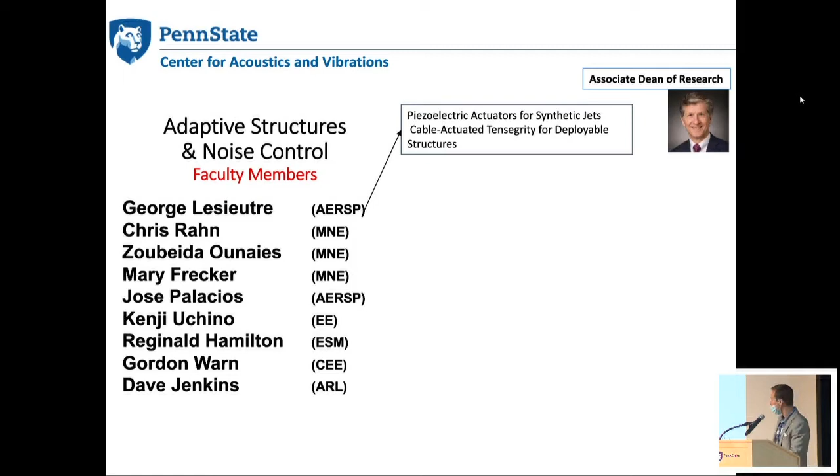So really fast, let me introduce some of these gentlemen. You have work going on in terms of piezoelectric actuators and deployable structures. That will be from George Lesieutre. From Chris Rahn, you can do all kinds of different activities that you can read here on the board. And again, the group continues passing through myself, which I'm going to list some of those in my presentation coming up, and other of us in the group. I would like to remind you that Ken Uchino actually retired recently, so unfortunately we've lost some of those capabilities, but I'm sure he'll be willing to answer questions if you reach out. I know he does for me.

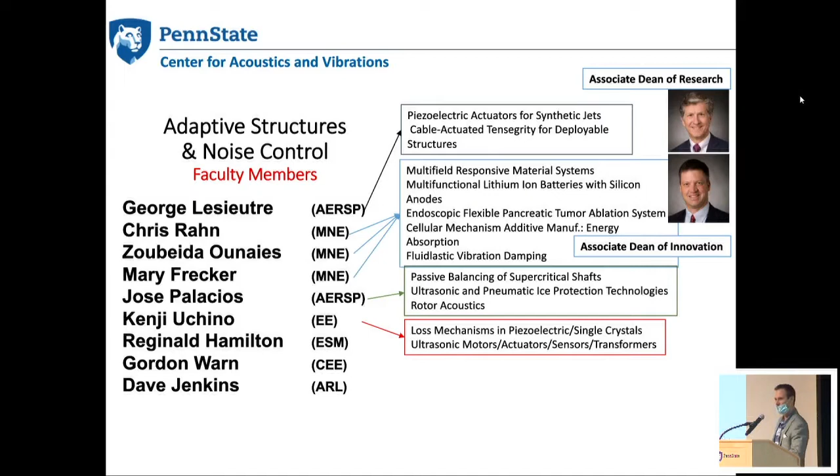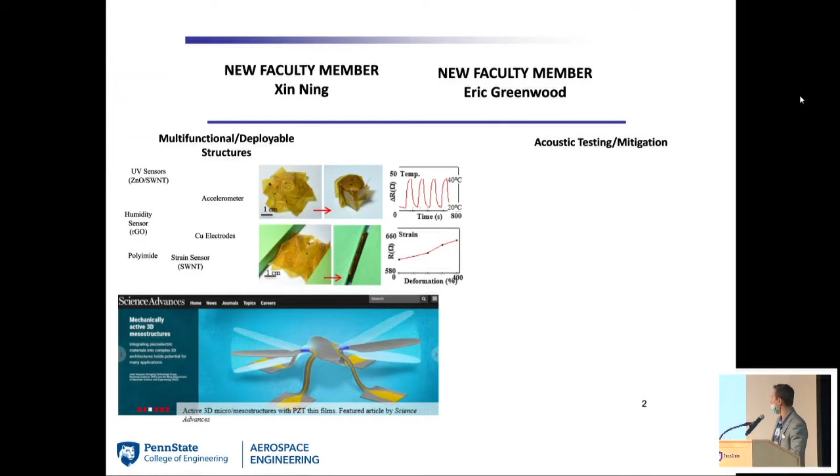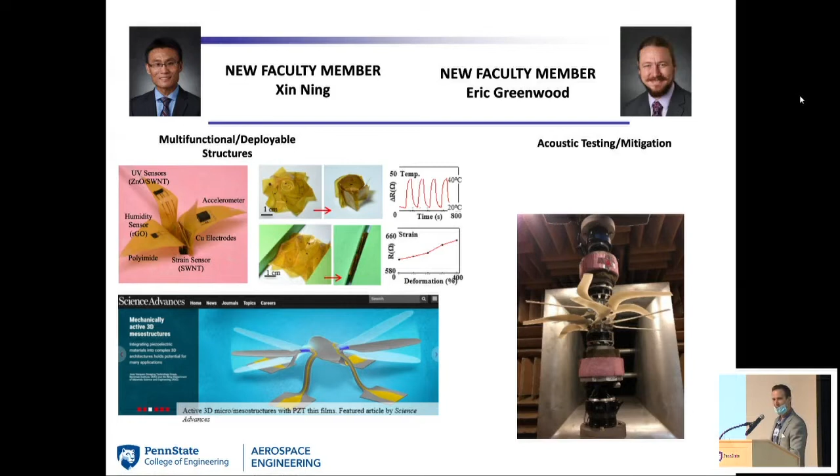And with this, let me go ahead and introduce the new group, because the good thing about the university environment is that we always have new blood coming in with new ideas and new assistants. So really fast shout out to Professor Ning and Professor Greenwood. You just saw some of the content from Professor Greenwood. And they're doing some pretty neat stuff in terms of multifunctional deployable structures. And Eric is working, I don't know why that's not showing. There you go, slow. Working quite a bit on acoustic testing, and it is a great pleasure that I'm actually working with him on some of that. I guess I can say that you're my partner in crime, literally.

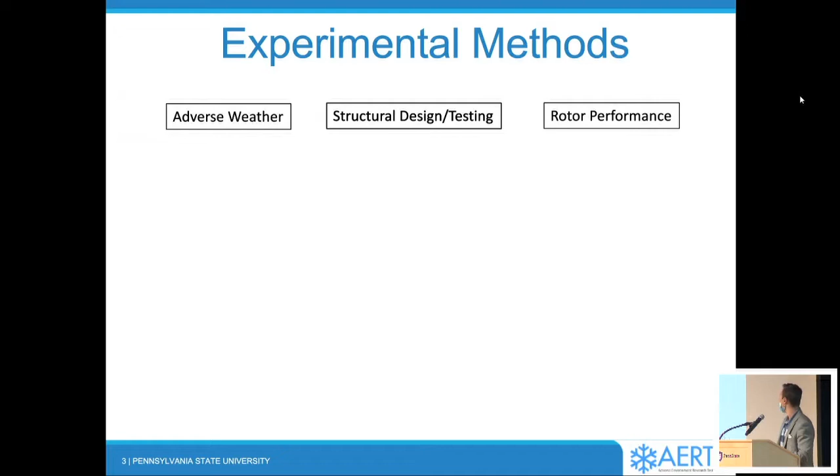So with that, today I would like to introduce myself, some of the things we do from my specific group. And in that front, I guess my hat will be an experimentalist. So anything that has some experimental component, I think I might be able to assist. So let me go through some of these different tabs that I get my hat switched on. We do quite a bit of structural design for testing. So for example, one of the projects we were working on has been the Dragonfly. And this is not quite too related, I guess, to adaptive structures, but certainly related to design of structures.

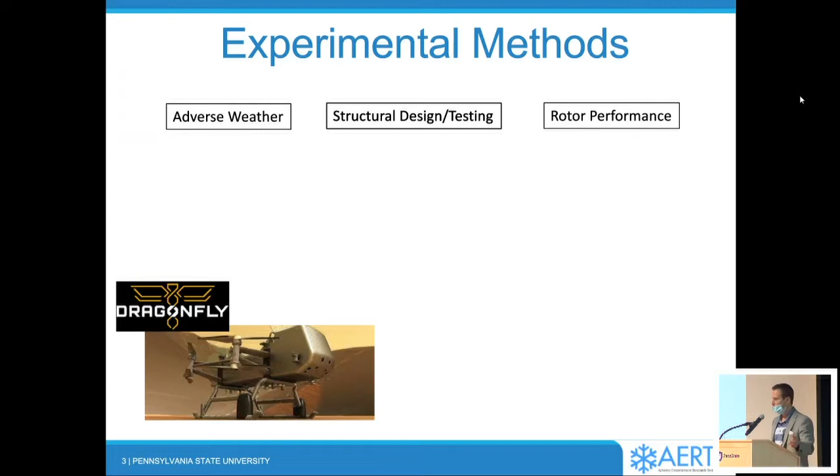So we have assisted with the design of the blades, and we have already conducted some half-scale wind testing at the 14x22 NASA wind tunnel. And we're very excited that we're going to go with a full-scale blade. These are 1.4 meter blades, coaxial configuration, to the TDT, Transonic Dynamics Tunnel at NASA. Heavy gas, try to reproduce somewhat of the aerodynamics that Eric Greenwood was talking about. You cannot run these things otherwise when you're trying to match Reynolds numbers, for example. So a little brief on that.

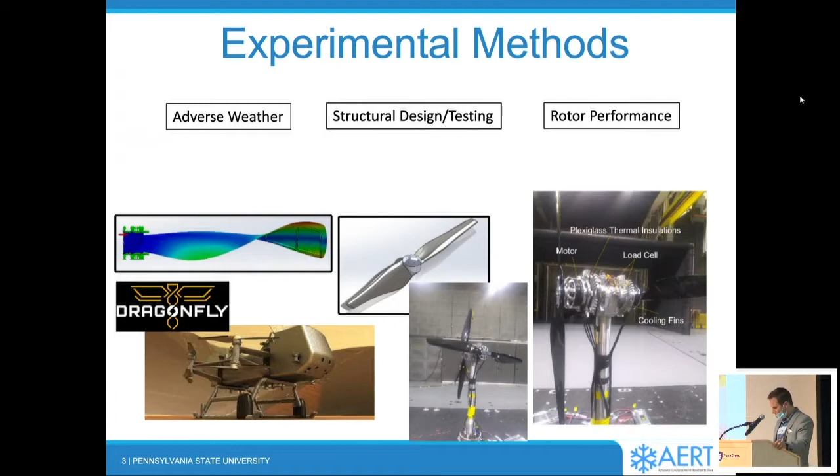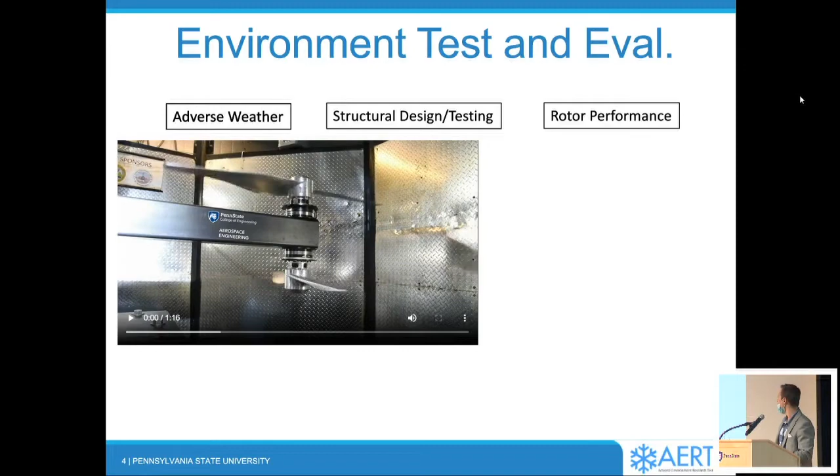Here I can show you a video of actually a full-scale configuration that we already tested. This is not at the TDT, obviously. This is in one of my chambers, so it's not aerodynamically comparable. But I can start playing with what the loads do, right? What kind of vibrations am I going to have to deal with on those arms and so on. So anyway, that will be my structural design testing hat, which now I'm going to go ahead and switch. If this moves forward, we want to move forward, please.

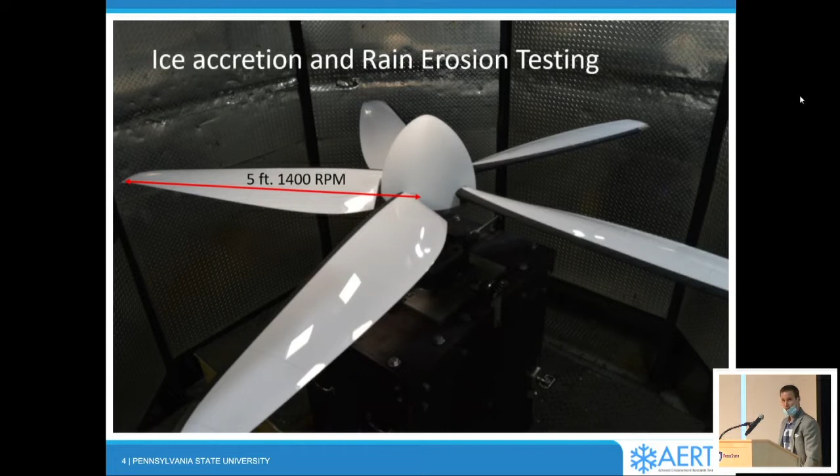Okay, so at that point, once I started creating ice on the rotor, I don't really care much about the aerodynamics. So I thought to show you that photo because the next tab I wanted to talk about is not the icing yet, but remember that rotor. I'm going to talk now about rotor performance, which we do a lot of balancing, acoustics, and aeromechanics.

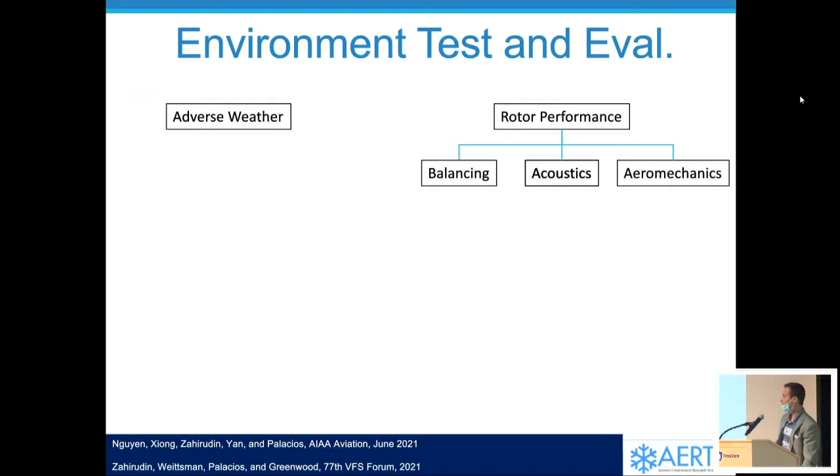Okay, so if we go ahead and look at the acoustics, this is now still in some of the facility photos. I work with Eric Greenwood. Some pretty nice capabilities there. If you're going to be in the short course, I'll show you all of these details tomorrow.

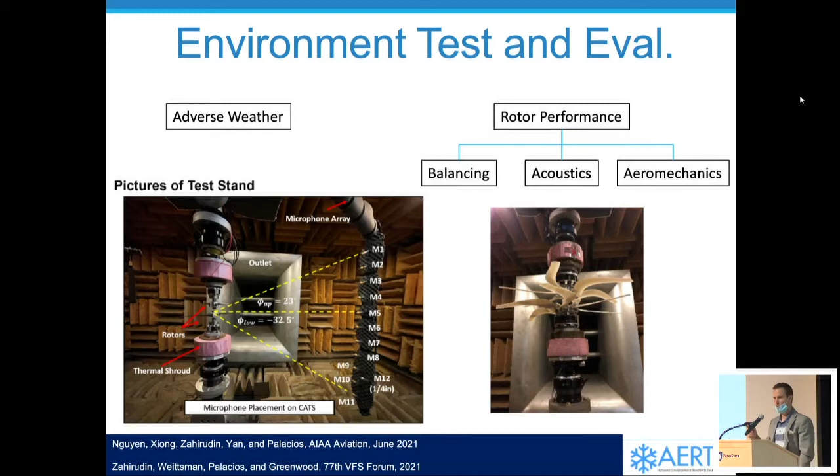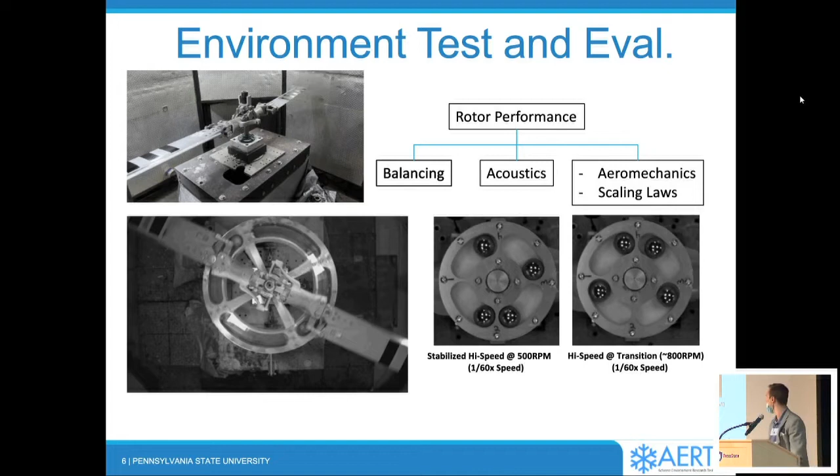And if we look into, let's say, balancing, that's the topic of the presentation today. Okay, I'm going to focus on adaptive structures, and we have developed a very neat passive balancing configuration that adapts to the vibration of the system to get rid of that vibration. So that will be the topic today. I'm not going to brief these images because I'm going to go through them in detail in the presentation. So let's go ahead then and start this presentation.

I got to give a shout out to my students. Really, they are the guys that make me look good. Lots of work done by Ahmad Haidar, currently working at Leonardo. He started this topic. And later, Ryan Blessington continuing the work. So I'm going to brief some of their work today. And again, the topic is passive balancing.

So your washing machine at home works on that principle, right? When you put your clothes on and all the clothes end up on one side and the machine goes supercritical, meaning post first resonance frequency, water on a surrounding channel goes opposite to those clothes to balance the system. So on that same concept, we decided to develop an adaptive balancer that will assist us with these imbalance events.

And imbalance events, I'm going to show you, there could be multiple. You could be thinking about a jet engine that loses one of the blades, or let's say that the blades start getting eroded asymmetrically. So that will introduce vibration to your jet engine, for example. Rotorcraft. Rotorcraft are not supercritical in general. But now that we start talking about these smaller eVTOLs, the rotors are becoming supercritical. And if you want super smooth flight for whatever mission you're doing, you could potentially introduce these passive balancers.

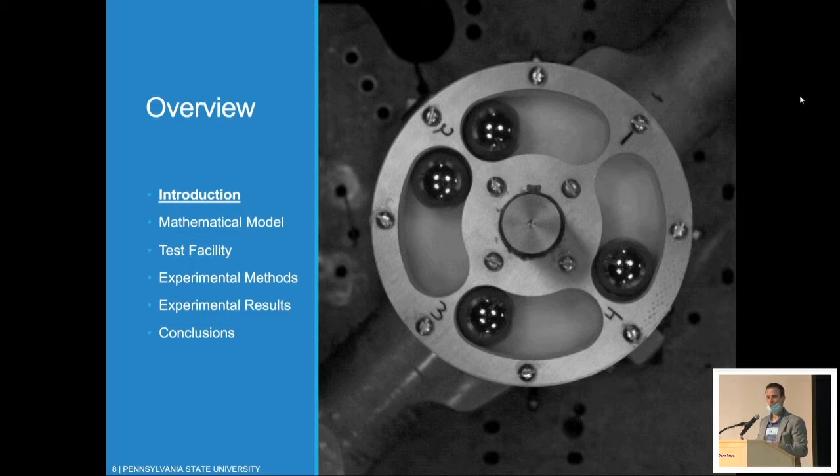So let me go ahead and give you a brief introduction. Again, you're going to have some eccentricity due to some imbalance. And the whole goal is to get rid of that vibration only when we are supercritical. This system will not work pre-resonance, and I'm going to explain why that is.

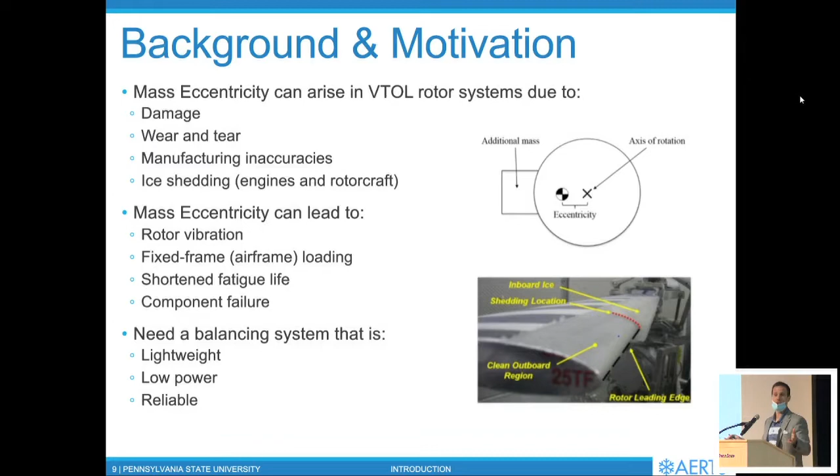So in my specific case, if you remember, I have a hat that is aircraft icing, right? So one of the big imbalances I deal with is ice shedding events. I'm flying the V-22, one rotor sheds one blade, the other two didn't shed. Now I have a huge imbalance on that rotor, right? So V-22 will not work because it's not supercritical. But if we have a smaller vehicle with the same configuration, for example, we would like to have a smooth flight even though we have ice shedding events.

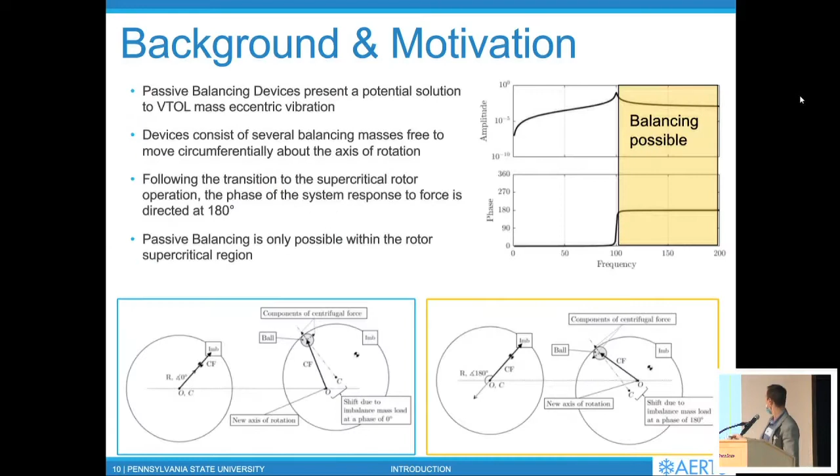So let's go ahead and look at how this eccentricity works. And again, this only works once you are post first resonance frequency of my system, okay? Before resonance it will not work. So let's explain that really fast with some images. Pre-resonance, if I have some imbalance, and I look at the forces acting on some masses around the imbalance. So the whole concept is to have these free traveling masses around the eccentricity. We're replacing the water in the washing machine with masses that can move on a track.

So you can clearly see that pre-resonance, 0 degrees, I'm on the blue box. My masses are going to go with the imbalance because I have a zero phase effect on that mass, right? So I'm going to make things worse pre-resonance if I have these masses freely moving around.

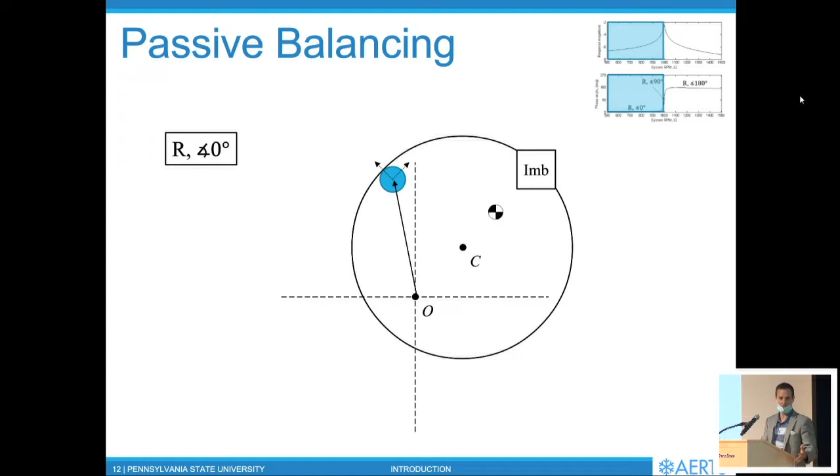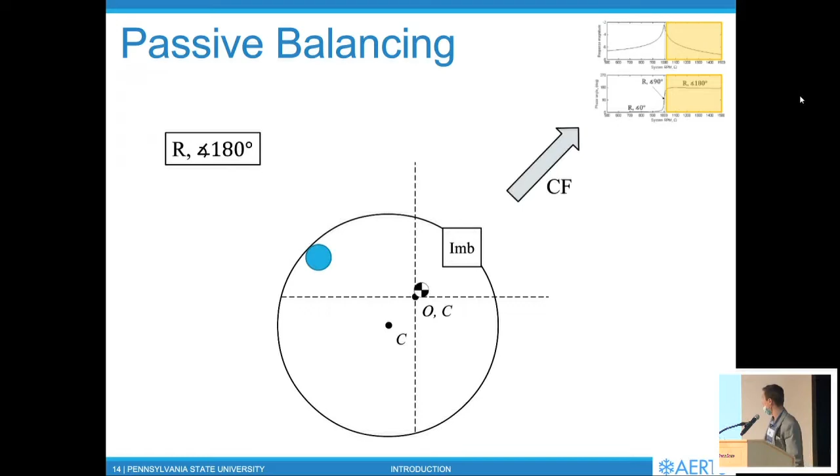Now, if I am post-resonance, post-180, the opposite happens. You see that now my forces are actually going to push the masses against the eccentricity, potentially balancing the event, right? If this clicks forward, there you go. The mass will go against the eccentricity, and now I have a balanced system.

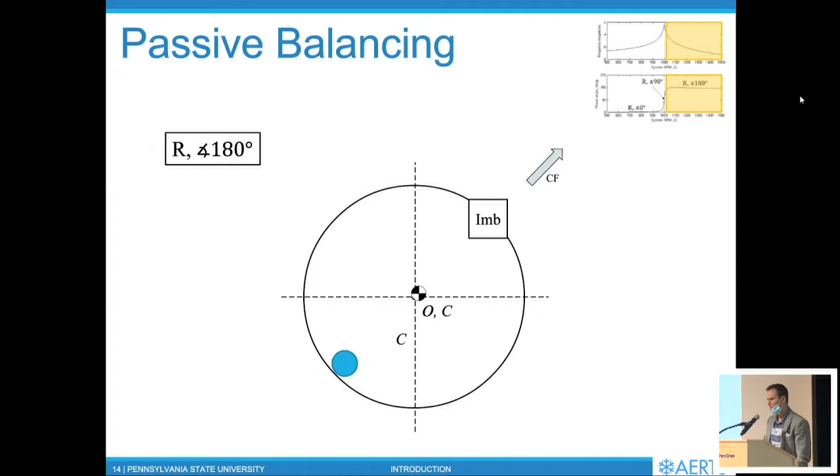So if we can introduce these free masses moving around that center of rotation, and I have a sudden imbalance, I can bring the system back to balance really nicely. So that's kind of the goal. This is what we want to develop. And obviously with applications to rotorcraft, that's my biggest hat, I guess, rotorcraft applications. Again, as the vehicles become smaller and smaller, eVTOL, you're starting to potentially be able to have supercritical conditions.

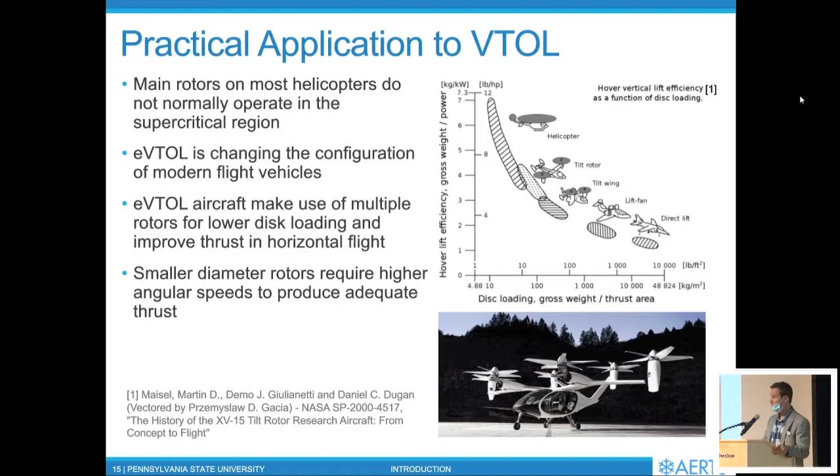And by the way, this is the rotor, the 10-foot diameter rotor I showed you in my facility. That's that vehicle. It was a very, very neat set of tests. So with that, and obviously jet engines, that would be the beautiful application. Those are all supercritical. Okay, so skip. Let's talk about partitioning.

I told you that if I have these masses around a track and I am pre-resonance, until I reach the resonance, I'm going to make the system worse. The masses are going to go with my imbalance, right? So to limit some of those effects and to also limit cycles that might occur through transition, we put partitions. So that way we do not allow all of these masses to make it really bad as I go through resonance, okay? So that's one of the tricks we learned through our modeling, which I'm going to brief really briefly.

So let's go ahead and show you what will happen without partitions. Subcritical, all the masses make everything pretty bad. But if I have my partitions, I'm going to limit those negative effects pre-resonance. So that's lesson number one that we developed for this technology. Supercritical, obviously, you're going to go against the imbalance, and you're going to make the system better. And we're going to show you all this with high-speed cameras if this works okay online.

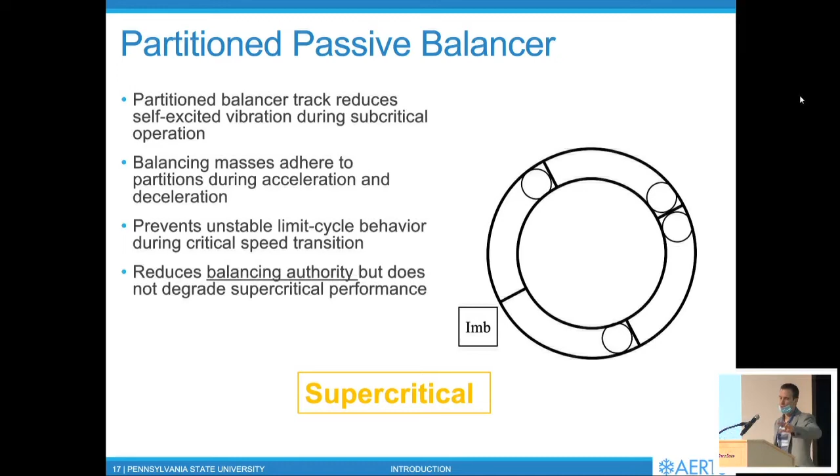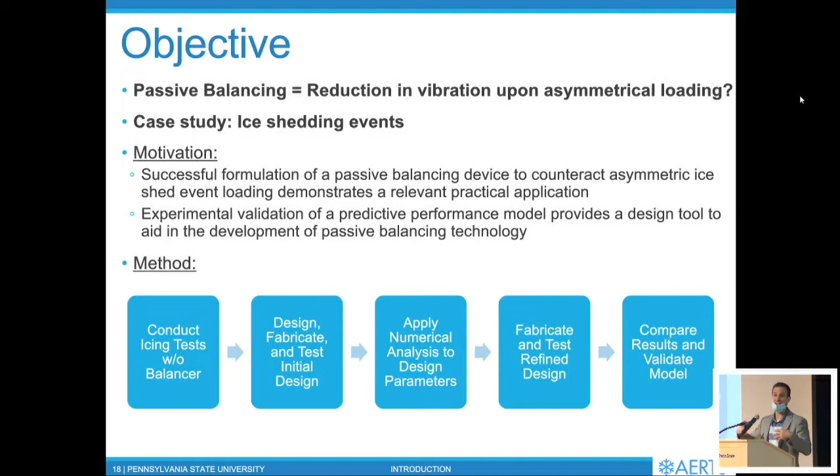Okay? So the objectives, again, is to develop a passive balancing system, and the case study that we focused on was ice shedding events. And this is very useful for us in the lab specifically because we run a lot of shedding events for different testing. So having the capability to balance my system allows me to run many hours of ice shedding for the customer. Okay? But again, that's not the only application.

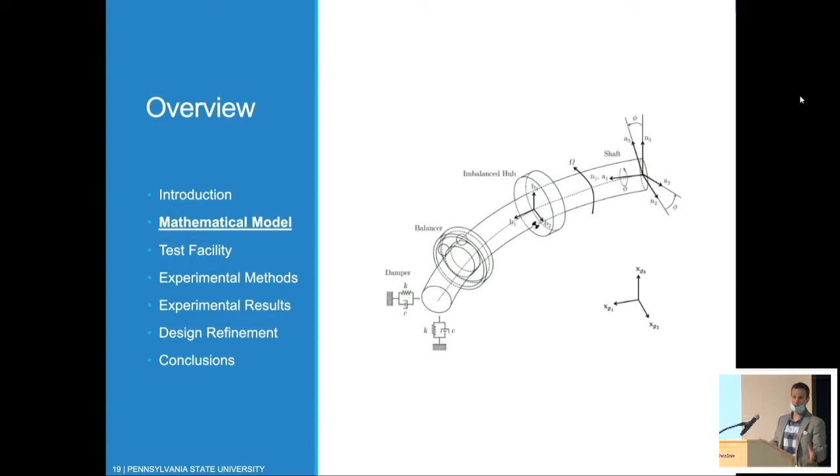So with that, I'm going to flash at you the mathematical model. And the reason I put this on the slides is in case there is somebody really interested in these topics. You have the slides. You can go through the equations. You can most certainly contact me or go through some of the publications. But it's a very comprehensive model, which has taken into account the flexible shaft, the friction of the balls, the centrifugal forces, of course, all the damping that could happen between the rotation of the balls and the track.

There's a lot of components that were not taken into account in the literature that have a massive effect on how you model and design the systems. If you ignore some of these factors, you will get potentially the very wrong answer, right? And I'm going to actually show you what happens when you use the wrong modeling, because our first passive balancer that we designed for my facility was based on literature equations. And we ended up with a balancer that didn't work, okay? It was only when we introduced friction on the balls traveling on this track that we were able to come up with a configuration that actually was applicable.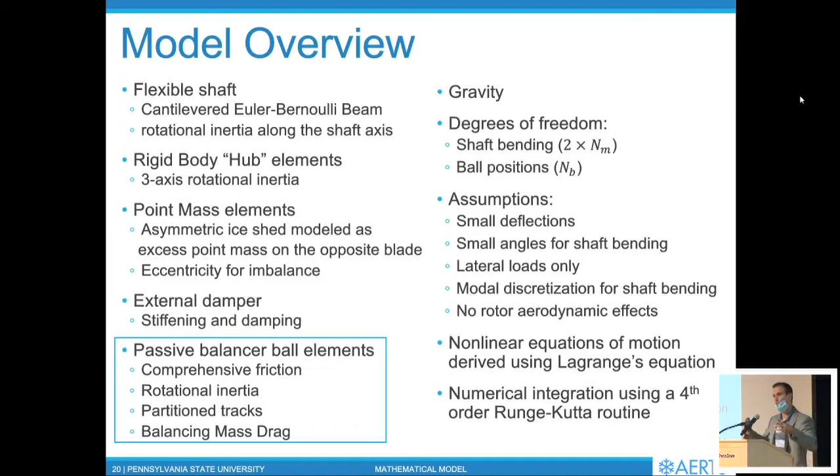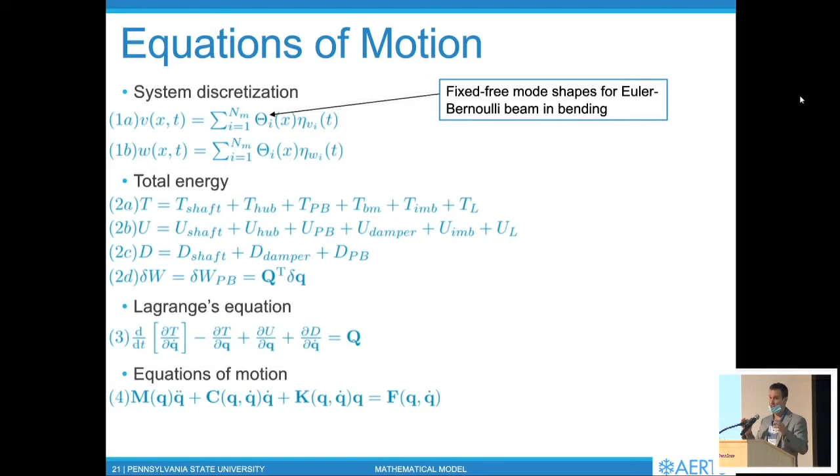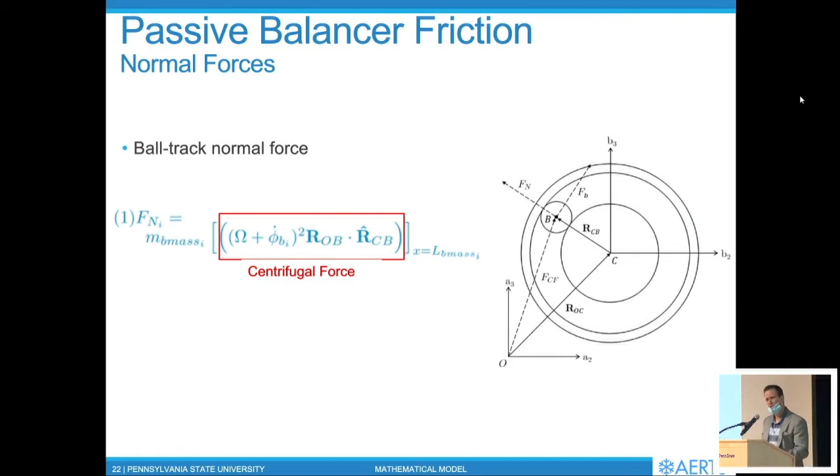So with that, let me flash you some energies, okay? So we're using Lagrange's equations, right? Trying to come up with the equations of motion. We're taking into account all my energies, and you can probably add even more terms. We're starting to consider now the fluid in the track, because I believe we can do some pretty cool things if we change the fluid from air to something else, right? So again, just flashing those at you. We're taking into account all the normal forces, the centrifugal forces, the friction, the rotation of the balls, the deformation of the track, okay? And all of those are going to show up in these equations, which end up in a model.

So let's go ahead and pray that this plays. Seems like it's playing. I see some motion on the bars. Is it playing? Please play. Is it playing? This is the problem of running things from online. It should be playing. We're not going to be able to see it. Hold on. Hold on. Let me go back. Okay, I see. Okay, is it working? See? It's loading. It's getting stuck. Now go back. Somebody push me back. All right, it's not loading.

Let me explain what will happen, okay? We're not going to be able to see these videos. That's too bad. If you have these presentations, please download them and check them out because it's pretty exciting stuff. What you will see is tremendous vibration on the one without the masses. Then on the middle solution, you will see even larger vibrations without the friction.

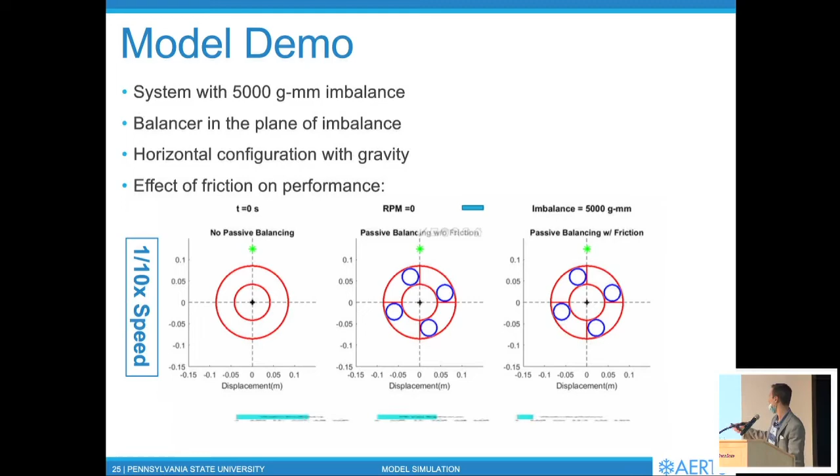And you will see that the friction system ends up with a solution that is different than the one without the friction. Okay? And I don't know why it's not playing, so I'm not going to spend any more time explaining it. What's that? Yeah, but you should be able to see those masses moving around. I don't know why it's not playing on the presentation. So in any case, take my word for it. See if you can download those and see the videos, and you will see how important it is to take friction into account.

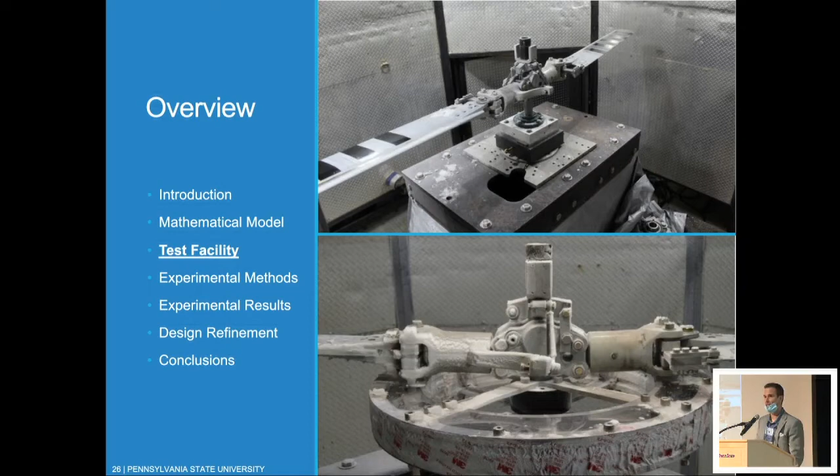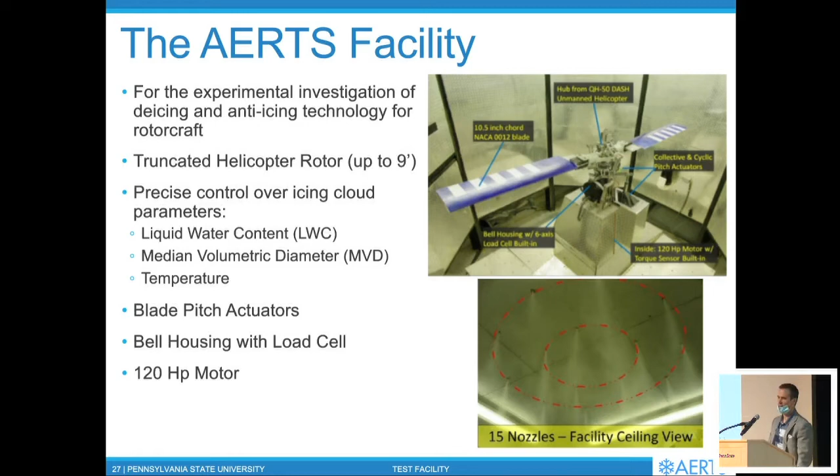So now we're going to go ahead and move on to our specific application, which is trying to make this work on the icing facility. Again, the rotors will accrete ice, the ice will shed, and eventually we want the passive balancer to take over. So the facility, the first balancer that we designed, again, was done without taking into account friction on the system. And we came up with this configuration that told us that it was okay to put the balancer under the rotor, told us which diameter we should use, right?

And we ended up having issues with friction because centrifugal forces will take over at a specific size of the balancer. And the balls will get stuck, and they won't be able to roll around the system freely, right? So the size of the balancer becomes extremely important related to the friction, which comes from the centrifugal loads, right? So right there, I already ended up with a system not working because I used the wrong assumptions on my models.

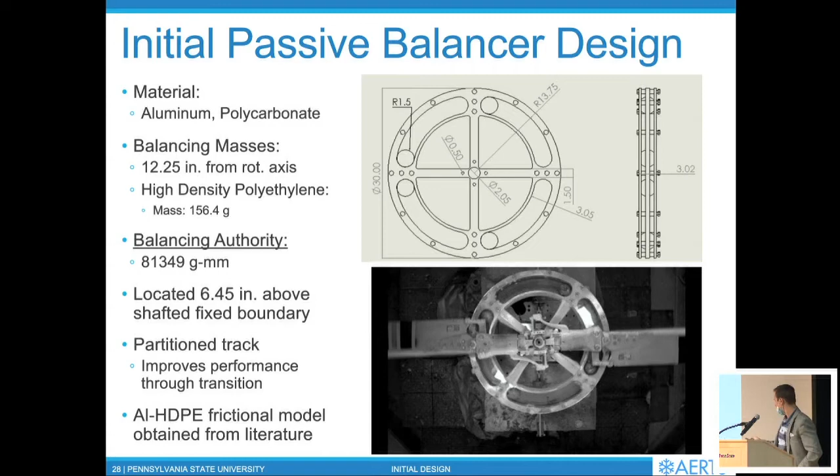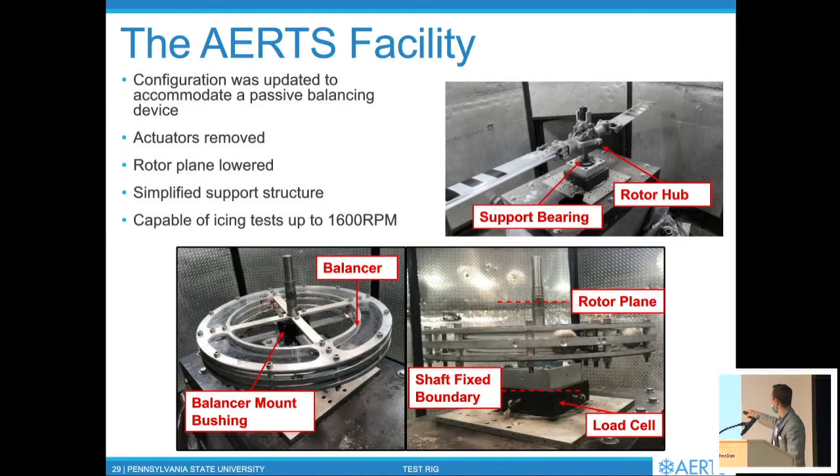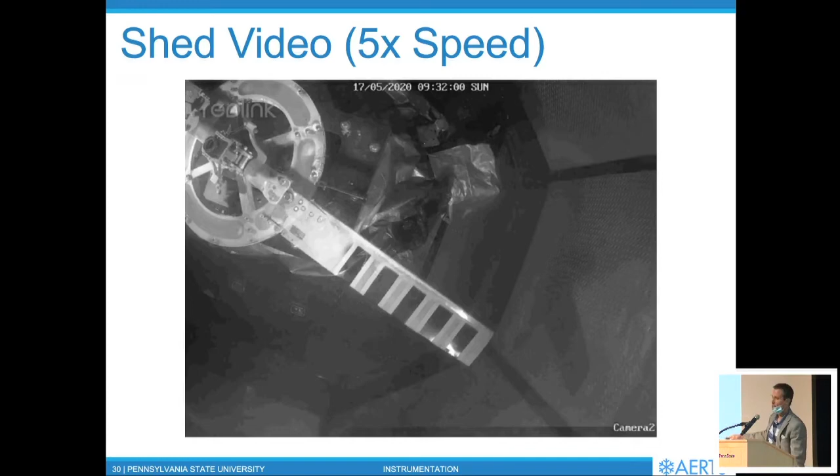So before we run to the actual configuration, I do want to show you what happened with a system that didn't work. So this is the balancer that we fabricated, has the masses traveling around it. You can see the partitions. You can see how it goes below my rotor. And here, this will be a high-speed visualization video of ice accreting to the blade and then shedding, okay? And again, we might not be able to see any of these high-speed videos given the internet connection.

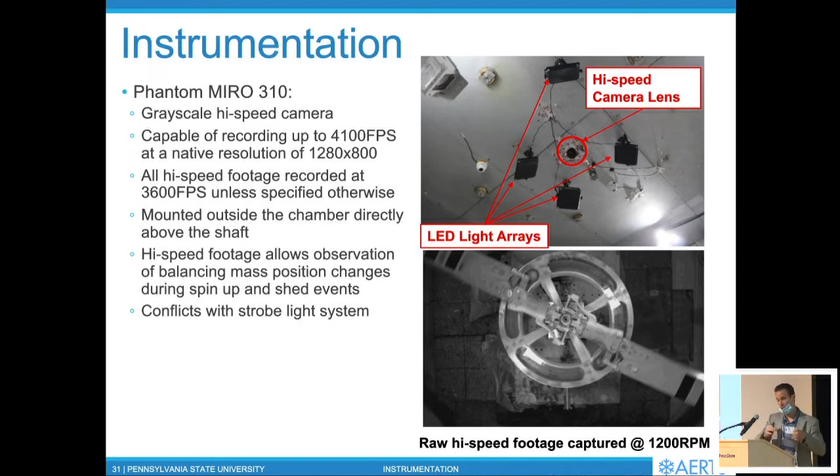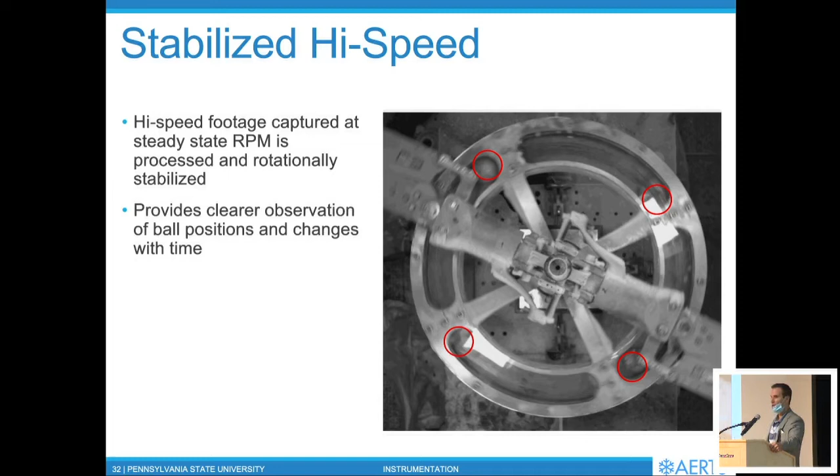We had a high-speed camera up above, so what I was doing is looking at the positions of these balls as they would move relative to my system. And the point is that these balls, right, on the high-speed video will just not change position even upon a shedding event, which create an imbalance. Again, friction took over, centrifugal forces will not allow these masses to move.

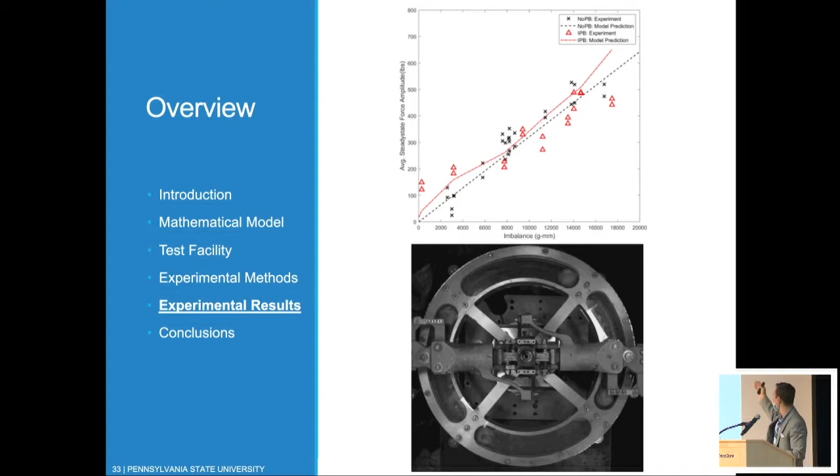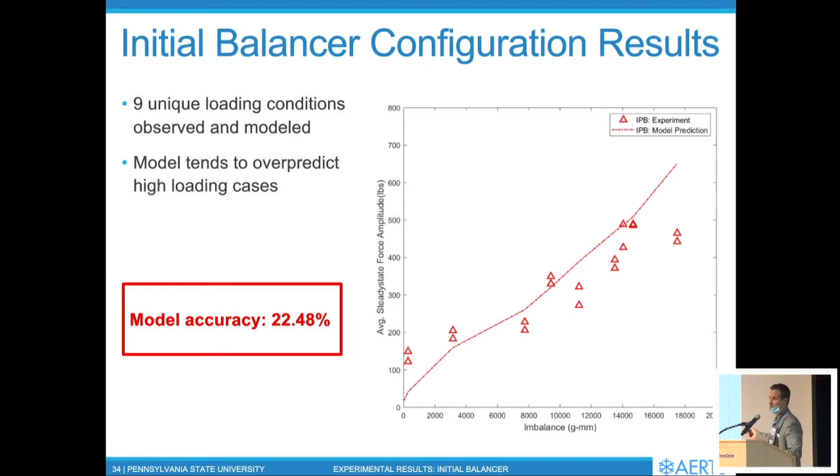So we did have a really good correlation, actually, once we developed the proper modeling tools that showed us what the system would do. And again, the experimental results gave us an accuracy on the model that was very favorable. Vertical axis will be your steady-state force amplitude versus your mass imbalance. But again, the performance was very small, right? These masses barely moved because they were constrained by the centrifugal loads and the friction.

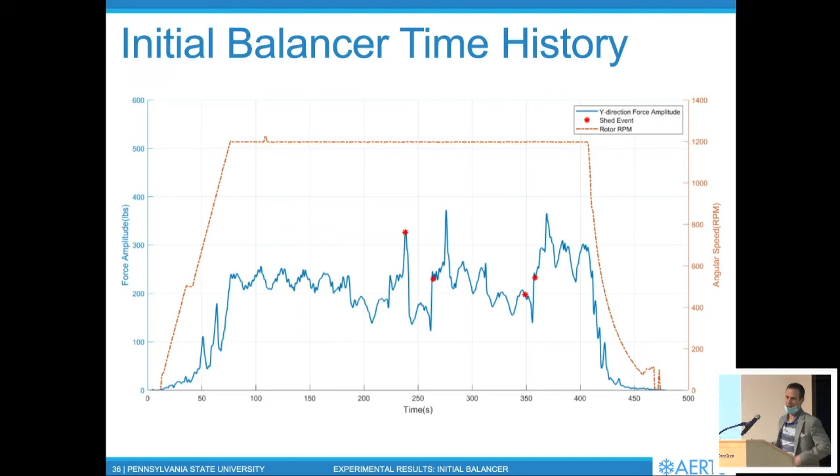And you can see here on this graph that my force amplitude basically didn't really change upon shedding events. The stars will be your shedding event, and you can see how the balancer, in some cases, even got worse, right? So you can see how the peak actually became a higher loading, higher force, even though the balancer should have taken over.

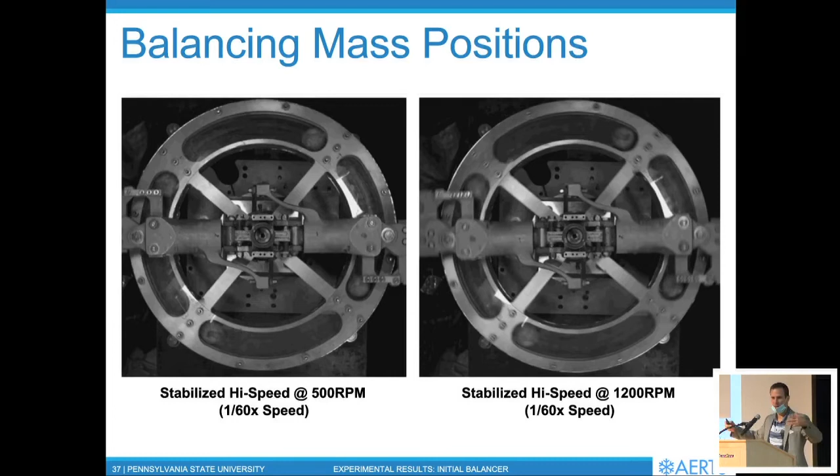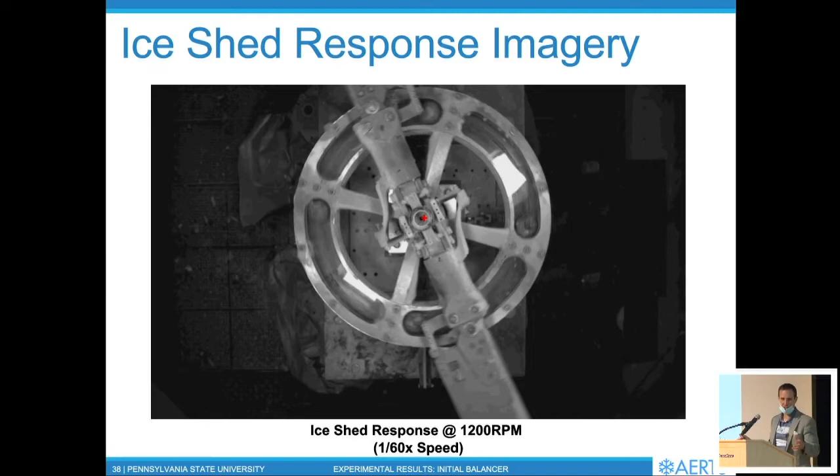So these high-speed videos, which you are not going to be able to see in this presentation, will show you how even at subcritical speeds, when I move on to supercritical speeds, my masses just don't move. They're stuck, right? Again, too big of a system, too many centrifugal loads, the masses cannot move. You had the wrong design because you used the wrong equations. So this, again, will be a high-speed video. You will see the system move around that point, okay? And nothing to see because the masses were stuck, right? So this high-speed video wouldn't help me with anything.

Now, let's use the right equations, take into account friction, and design a system that will actually allow me to balance. Well, let me go back. I'm showing you too much. How now, based on these equations, we got smart and we figured out that putting this balancing system farther away from the boundary conditions will actually give more inertia to the masses, which is very good. Also, we realized that if I make this too large, centrifugal forces will overcome my capability to move the balls. So there is an optimal position in terms of the sizing for those masses.

Also, we got very smart, and since friction is very important, let's not use metal against metal, because it's pretty high friction. Let's use something with low coefficients of friction, okay?

The other thing we saw on the first system is that ice will get into our balancer, and the balls will get frozen in place. So we also encased everything to protect it against ice formation.

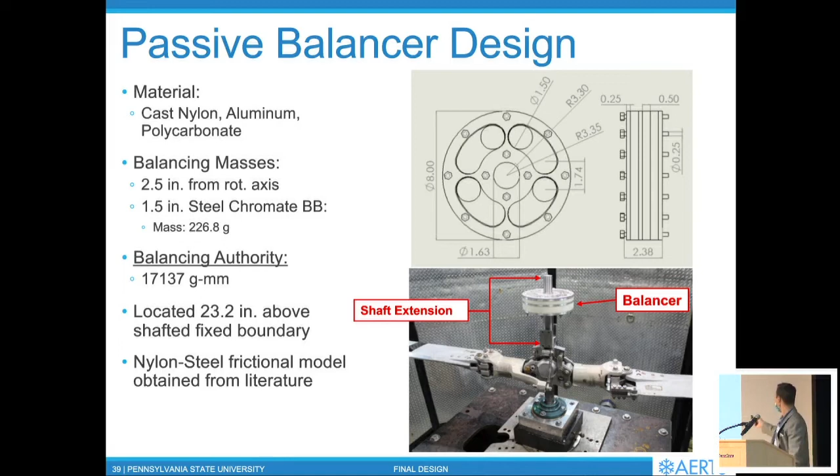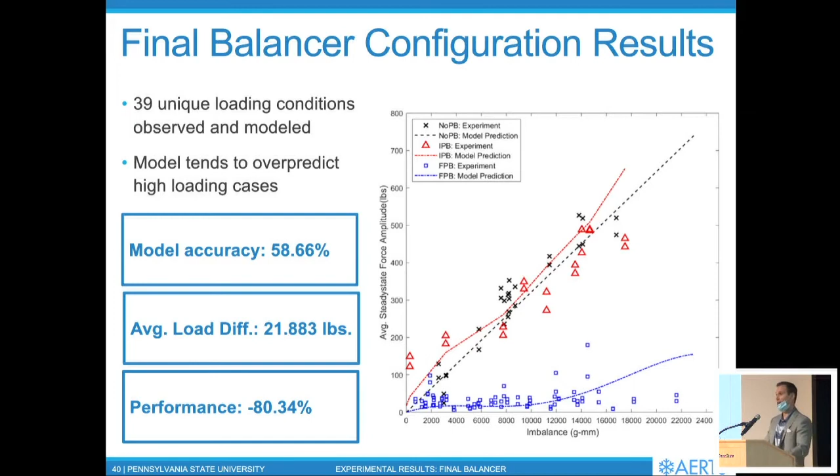So very neat design. And my performance went from 8% to 80%, right? In fact, 8% plus before, I was making it worse, red, to negative 80, blue. Nice design for a balancing system. So this is really the chart that says everything. You can compare to the prior one if you remember, right?

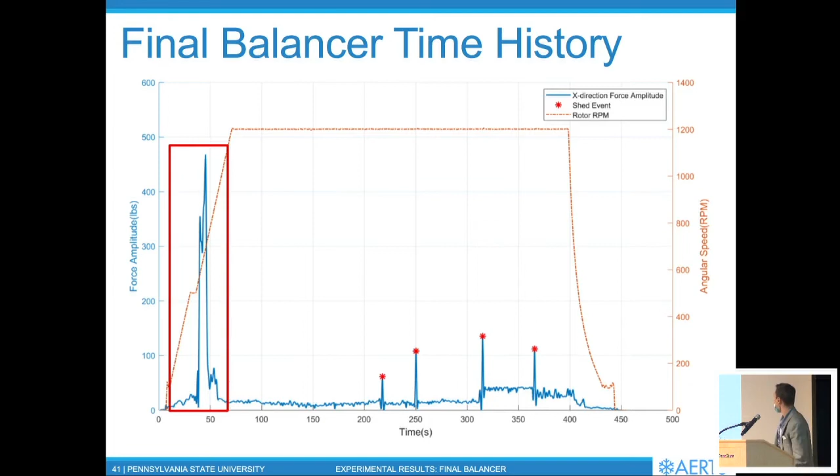So supercritical, we're great. When we're running tests in the lab now and we're seeing shedding events, we are happy. Back in the day, we would shed something and the building would shake, okay? So again, that's my transition point.

This is too bad you're not going to be able to see this because this is high-speed visualization of where the masses go subcritical, 500 RPM. I might tell you that the resonance frequency of my system is 900 RPM. So once I pass 900 RPM, you will see a steady state compensation of the imbalance. So 900 RPM is my transition.

The transition is really neat because this is the area where you cannot find solutions to where these masses go. So they start dancing around quite a bit, right? And then make the system vibrate pretty severely.

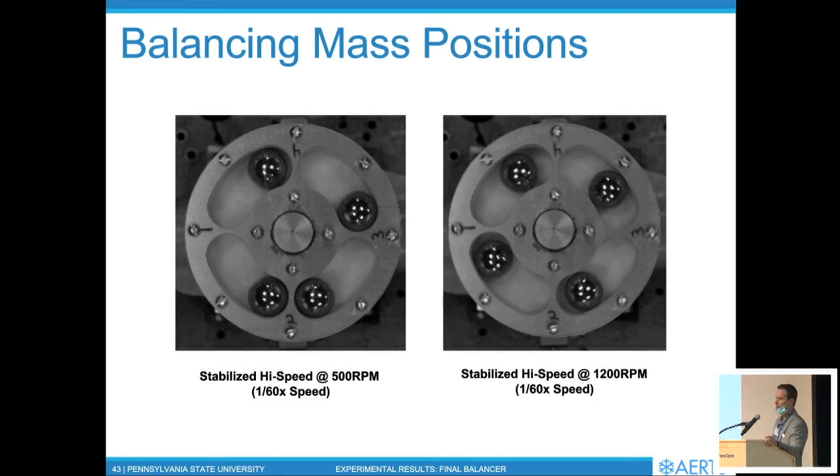Yeah, I don't think so because I have it automatically to start with my click. It's a problem with the bandwidth, right? These are very large videos embedded on the PowerPoint, so they won't play unless we download it. But it's okay. You understand that these balls will be moving, right, quite severely on this high-speed visualization. And if you are really interested, please go ahead and download that presentation.

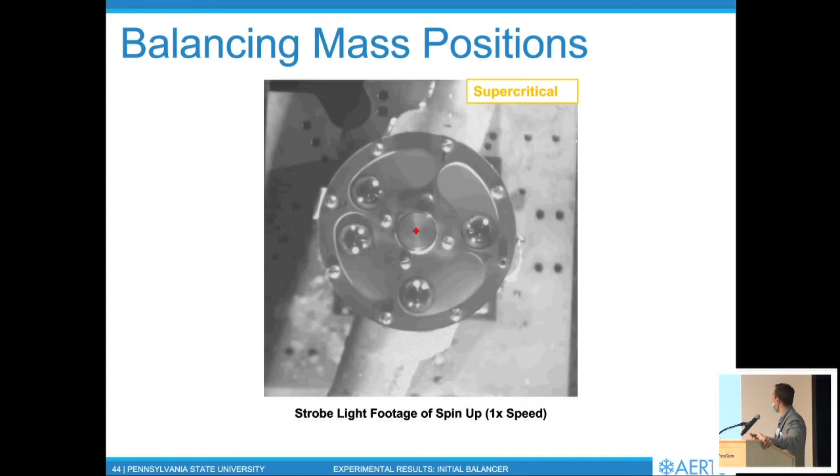So initially, you will see some motion. Through transition, it will get crazy. And then you will end up with very nice zero vibration. This will be now the perfect steady state condition at 1200 RPM, where you will see how the masses are going to compensate whatever imbalance I have on the blade. Okay?

So flashing images, because you're not going to see them because it's not going to work. But this, again, will be a strobe light with ice in it. You can see how I have ice on top of the system now, because I will be spraying a cloud. And what will happen here is a piece of ice will shed. And then you will see a sudden motion of those balls against that ice shedding event, and the system stays balanced. Okay? So it will be like a split second.

Like on one frame of the high-speed camera, all of a sudden you see these balls move against the imbalance. So it's pretty neat. Too bad you cannot see it. But take my word for it. So with that, I don't know how I'm doing with time, because I was going to spend more time on the high speeds. But let me move on to the conclusions.

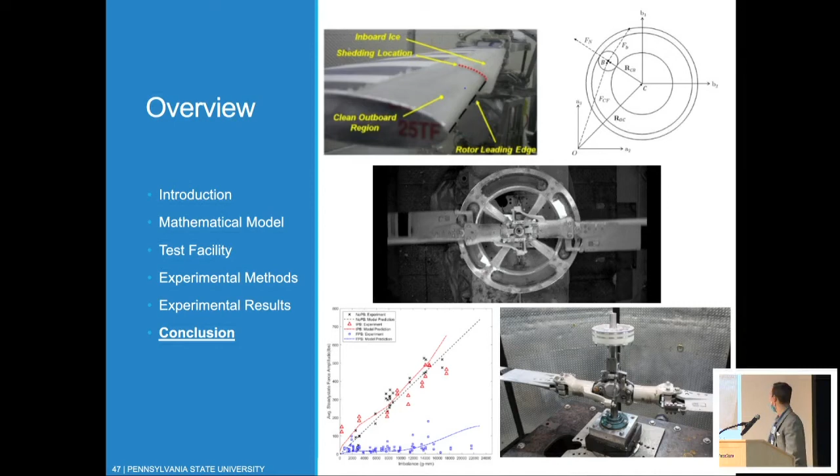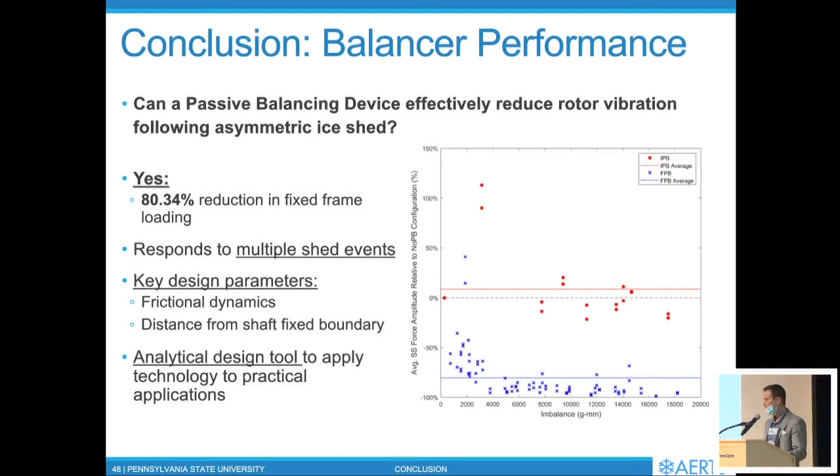We have been able to design a balancing system that has brought me to a reduction of almost 80% of the vibration with respect to a shedding event of very large masses. Okay, we're talking about huge imbalances here. We have developed the model to be able to come up with these configurations. And right now, we are working on improving this from the point of view of the engineering application.

I told you that as I go through resonance, this is not good, right? I do not want to go through resonance and have a worse condition than I would have if I didn't have the masses. Even though, as supercritical, you get me better, I still don't want to sacrifice my system every time I go up and down.

So what we're working on is a clamping system where, on the first spinning event, you will be just as bad as always, right? The first time you spin it. But then once you get to the perfect condition in the supercritical regime, imagine these balls have found their magical spot. On the way down, the clamping system, which is CF-based, centrifugal clamping, will hold the balls in that magic position. So now you come down perfectly located.

As you go back up, you are now perfectly placed, so you do not have any of the vibrations. Once you reach RPM, centrifugal takes over, the clamps release, and now your balls are okay to prevent any imbalances due to transient events. So to me, this is a good definition of an adaptive structure. Okay? It certainly adapts as you are changing your imbalances.

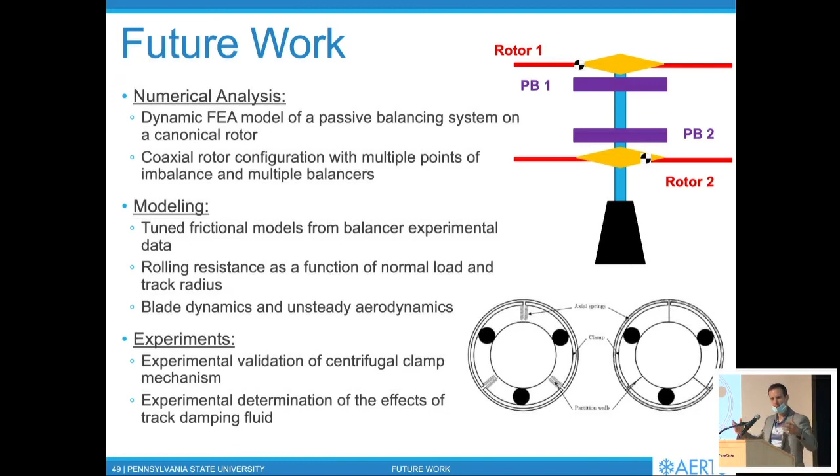We're also working on trying to implement this in multiple systems, because what happens now when you have two rotors on a single shaft, right? What do we call the first resonance frequency? Do we have multiple modes? Can we make this work, and in what frequency regime? So it gets a lot of fun in terms of the mathematical modeling.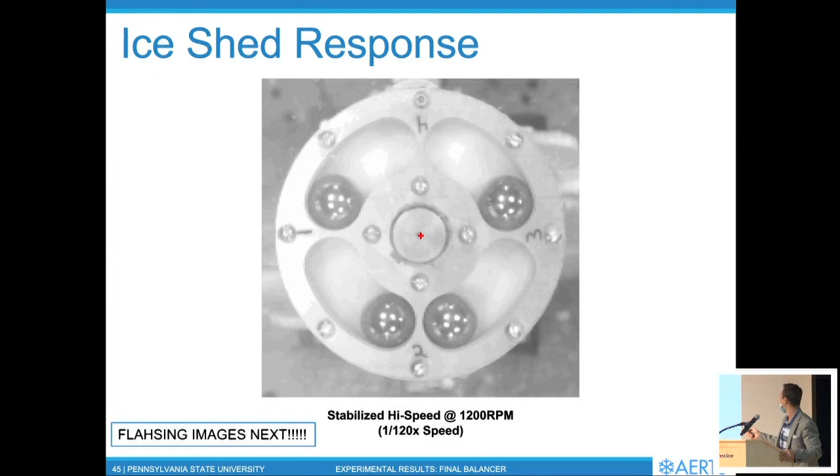So with that, I believe I have time for questions. I'm going to go back and see if we can see at least the coolest one, which I think will be this one. Let's see if it loads while you guys ask me questions. If it loads, great. If not, we'll call it a day. Yeah, this is why this whole Zoom thing is not ideal, right? The old computer here with the flash drive was the way to go, but that's okay. Any questions? Okay, questions for Jose?

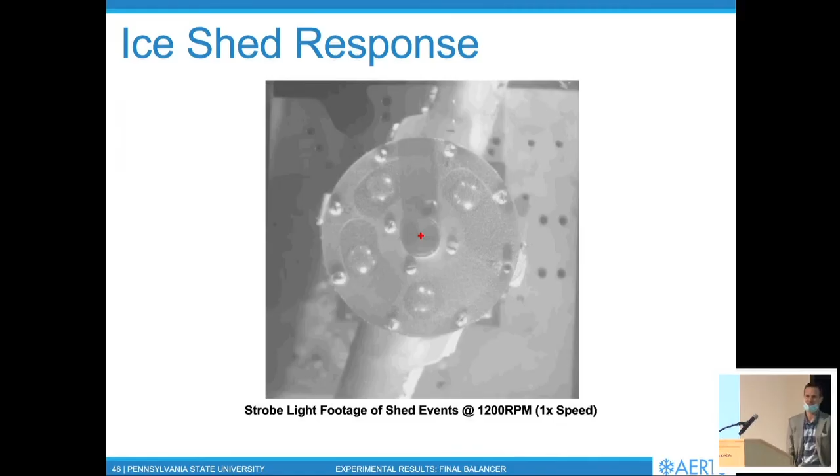Are your own students allowed to ask questions? Go ahead. First, quick comment, Jose, it's a GIF, so if you download the presentation, the GIF will play. It's not going to play over the internet. It's not a video. Okay.

So, quick question, because I had an interview with Rotor yesterday, so that's feedback from industry. We are using the small deflection assumption here, but the force that's going to drive your balancer is kind of proportional to your deflection, right? So should we consider using different models to verify the passive balancer?

I think the deformation is already taken into account in the model. As you'll see, the new design of the balancer did not end up far away from the boundary condition for no reason. It ended up where the deformations are maximum, right? It's not only a load issue. In the original models, we were only considering the forces. And that was the wrong assumption, because physically, if you put a balancer right next to a boundary condition where nothing is moving, you're not going to have any effect on those masses to move around. The farther away you put it, the more you have maximal deformations.

So the point is, if we're going to be placing these balancers on a long shaft inside of an engine, because this is the perfect application, an engine is a hollow tube shaft where we have real estate to implement these masses. So you're going to place them at the antinodes, not close to the nodes. So you're right, the deformation is a critical factor in where to put these balancers.